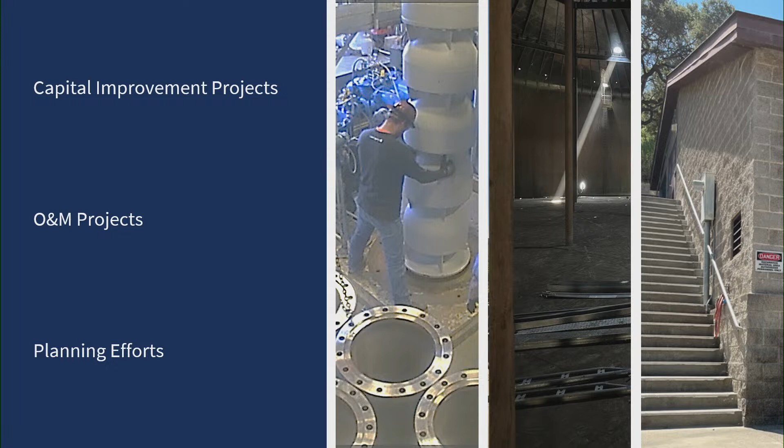First, work is continuing on rehabilitating our 3 production wells in the Santa Rosa Plain. These wells are not routinely used in our day-to-day supply, but in times of exceptional need, like in a drought, they tend to be used more. However, due to some changed regulatory requirements associated with chlorine contact time, these wells were unfortunately not in production ahead of the last drought, and we found ourselves needing to rehabilitate them.

During that drought, we were able to get the Todd Road well back into production, thanks to some heroic efforts of our staff. We also managed to secure a $6.9 million drought resiliency grant to help rehabilitate the other 2 plain wells that we have, not only to rehabilitate them for production purposes, but also to include the capability to recharge groundwater with those wells as part of a proposed future aquifer storage and recovery program, storing available winter water for later use.

At Occidental Road well, we've completed installation of a new well there. That well is intended to improve the water quality issues compared to the existing well and sanding conditions that were occurring with the existing well. Design of the top side elements of that project, the pumping, the piping, electrical, instrumentation, and control work is out for advertisement right now, with construction to commence in 2025.

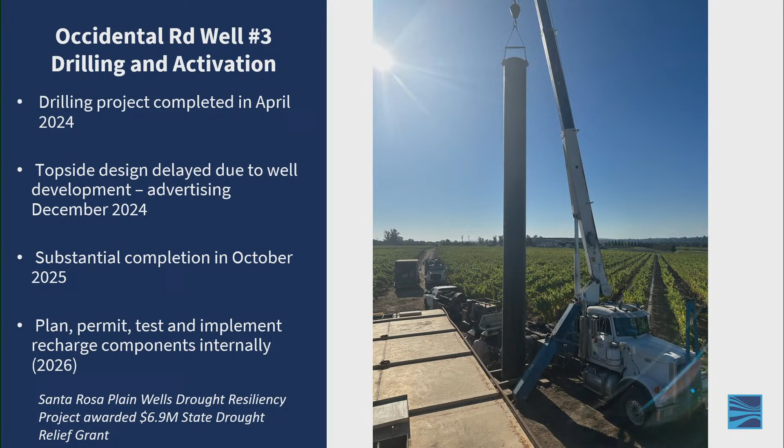The second well there, the Sebastopol Road well, is further along. This project's under construction. We completed a portion of this construction while under emergency contracting during the drought proclamation until that proclamation ended, and then we had to step back and prepare complete engineering and contract documents to bid the remaining work. This past summer, we did lose a month or two, unfortunately, due to a damaged existing valve on the aqueduct, on our 48-inch aqueduct, requiring us to implement an urgent, unplanned shutdown of that aqueduct in order to repair it.

So we now find ourselves wrangling with the weather to complete that project and maintain the project schedule. But we still do, by next summer, expect to have production capabilities ready for that well, and to be commencing the pilot testing for the aquifer storage and recovery elements. Most recently, we did receive some guidance from the State Water Board on how to pursue the water rights for diversion into storage for that well, so that was great to receive. And we're certainly appreciative of the city's coordination with us in being able to connect with the recycle water line to benefit some of the operations associated with that well.

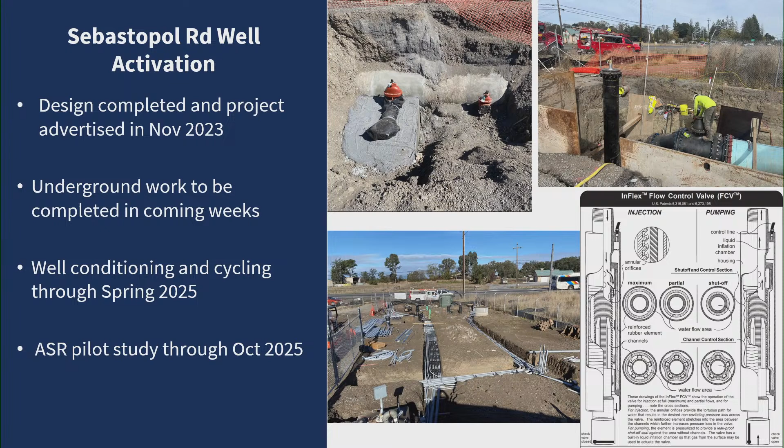One of our more significant projects is our tank rehabilitation program. It's a 10-year, $80 million program addressing some long overdue recoating of our 18 storage tanks in our water transmission system, representing some 128 million gallons of storage. With this project, we are also replacing associated cathodic protection systems, evaluating seismic conditions, and making other minor modifications as needed.

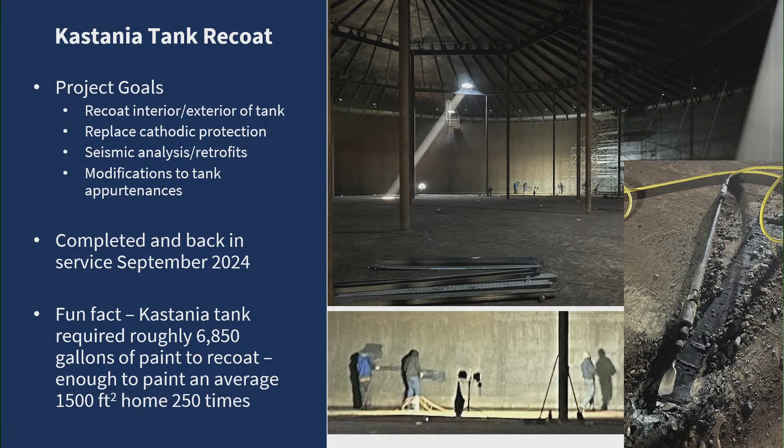So the Kastania tank is a 12 million gallon tank. It's the southernmost tank in our system that was recently completed and returned into service in September. This tank was particularly satisfying to complete, as it did represent the removal of our last coal tar tank lining in our system, replaced with an epoxy-based interior coating system. So we were quite pleased with that. And under that same construction contract, we also just last month completed and put back into service our 6 million gallon Cotati 1 tank.

One of our two largest tanks is our Cotati 3 tank. It's 18 million gallons in capacity. We recently opened bids on that contract and do intend to award that contract in January and expect to have it out of service for much of 2025 for recoating. So in addition to the interior and exterior coating work, the cathodic protection work, and other minor appurtenance modifications, things like ladders, vents, and overflows, we'll be retrofitting on this Cotati 3 tank the foundation ring, retrofitting it basically by widening it. There's a little detail up there of how they're doing that.

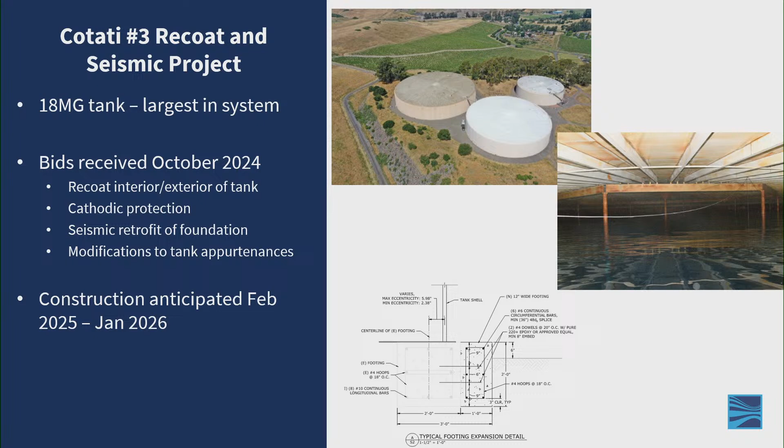To address a seismic deficiency that was identified in our seismic assessment, the existing tank is loaded eccentrically on the foundation that we are going to try to address. It is incidental work to the recoat work, but for a tank that has a diameter that's nearly the length of a football field at 280 feet, it is significant incidental work for the project.

So moving past tanks and wells, we'll talk a bit about cathodic protection. Our aqueducts are constructed with passive cathodic protection or corrosion protection systems. They have reached the end of their useful life, mostly exhausted. We are replacing them with an impressed current system, installing rectifiers, imparting a small current into the pipe to prevent corrosion.

Following some prior cathodic protection conversions on the Sonoma Aqueduct and the Petaluma Aqueduct, we're now currently advancing efforts on the Santa Rosa Aqueduct and our Russian River Cotati intertie. And we've split that effort into 2 phases, with the smaller phase targeted to advertise in just a couple months here in February, and phase 2 a year later in 2026, as the phase 2 sites had more significant right-of-way and permitting challenges associated with them. And do also appreciate the city's coordination and work with us on right-of-way and encroachment permits for those projects.

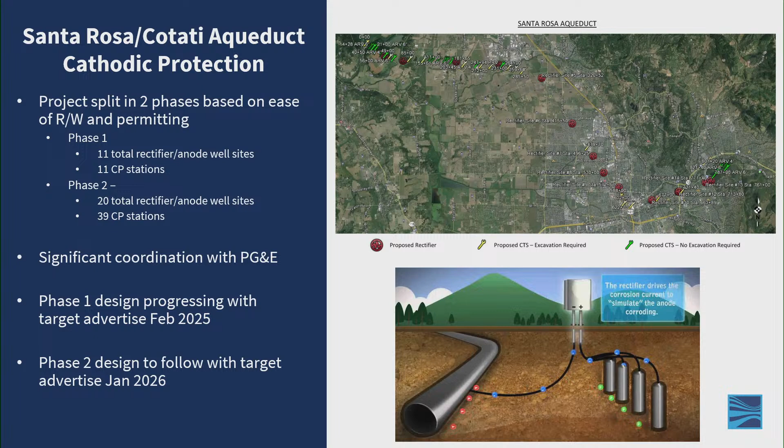At our Wilfred Booster Station, which is located along our Petaluma Aqueduct and Rohnert Park, we are updating the outdated electrical equipment, addressing some seismic vulnerabilities, and installing a redundant pump set for resiliency. While this pump station, when it's normally operated, generally pumps to the southern portion of our system, it does have a unique vital role, being our only pump station that allows us also to pump north into the Santa Rosa area from the south. This has been essential for us under certain conditions, such as when we've had portions of the aqueduct system that had to be shut down for construction or repair purposes. So it's a valued facility in that regard.

This past June, we've pre-purchased equipment for that project, and the project's scheduled to advertise for construction in 2026.

One slide that I don't have today, but I want to mention, is the Ely Booster Pump Station. It's been under contract, a construction contract with us for more than 2 years now, but we haven't yet been able to break ground on it due to the electrical gear procurement and delays associated with that. We finally now have a delivery date that's anticipated in this coming spring, so we expect to advance that project in construction this coming summer.

It's a FEMA-funded resiliency project to replace electrical gear and protect it from flooding near Ely Road in Penngrove, Petaluma area. And I mention this project primarily just to highlight one of the challenges that we continue to face, as I imagine the city is also facing in procuring electrical gear. Some supply chain challenges still remain for some equipment, but particularly the electrical gear. And this isn't our only project that's suffering through that.

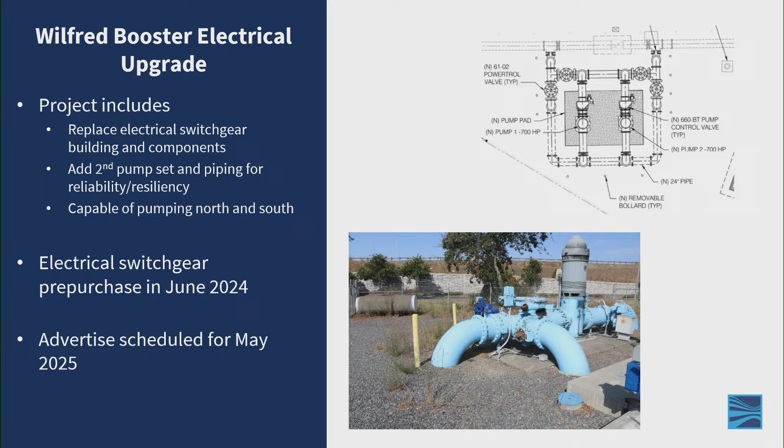This project design is currently at 30%, and we intend to advertise construction on that. At this point, the current thinking is seeking FEMA funding to substantially pay for the construction, so that's likely in 2026 that we hope to be able to do that.

Also, we've recently completed a feasibility study looking to address our outdated chlorine and pH treatment systems with a modernization project. We're kicking off the design of a multi-phase effort to implement upgrades necessitated by our aging infrastructure, some operational and other infrastructure changes that have occurred in our Wohler-Mirabel area over the years, and some newer regulatory compliance requirements being imposed. Also addressing the safety issues in converting away from chlorine gas.

Also included in that project is addressing high vulnerabilities for our 12 kV electrical system that serves the area, which is subject to high vulnerability to fire, flood, and seismic hazards, liquefaction, and lateral spread specifically. So this is a significant project both in scope and cost, constructing new sodium hypochlorite facilities at our Wohler site, our Mirabel site, as well as a new hypochlorite and pH control facility at our River Road facility in the general area.

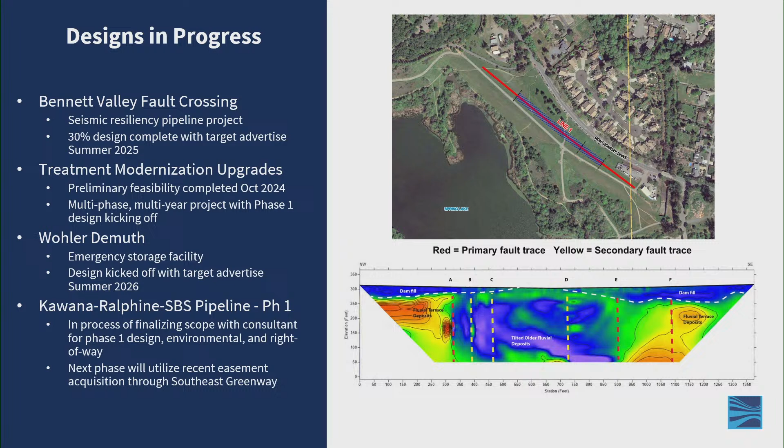On the maintenance side of things, we have been completing washout inspections of our tanks, including complete draining and cleaning of those tanks, along with minor repairs as needed. In addition to the general maintenance benefits of that work, these efforts are helping to identify the appropriate prioritization and scheduling of the tanks for the bigger tank rehabilitation recoating program that I spoke to earlier.

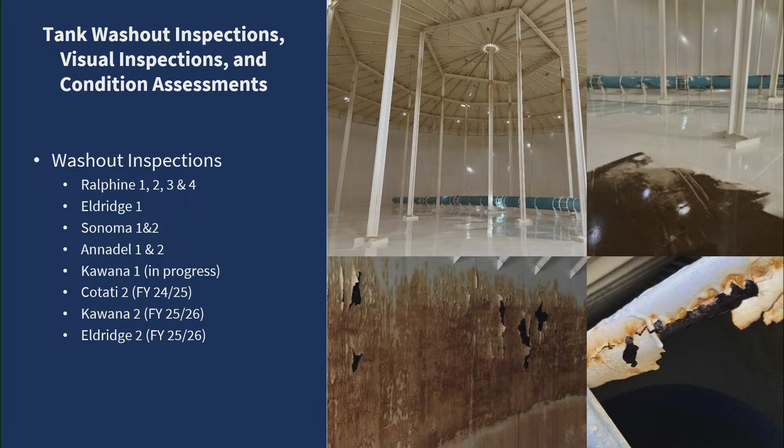Over the last couple of years, we completed 9 tanks, shown in the first few bullets here on this slide. The Kawana 1 tank is in progress right now and out of service, and you can see the additional 3 tanks there that are planned through next fiscal year.

This is just a summary showing the various tasks that were completed the last two fiscal years, those first two columns, and those that are planned in blue in the remaining columns in the current and future fiscal years for the tank maintenance program.

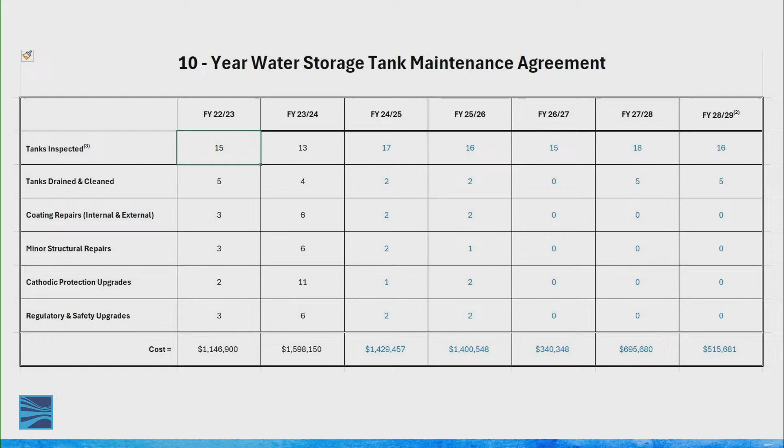On the planning front, we are in the process of developing a comprehensive master plan for our water transmission system. It is a multi-year effort, and our consultant, Carollo Engineers, has completed the first task looking at baseline conditions, assessing facility information, water supply agreements, condition assessments, long-range financial plans, and our capital improvement plan.

In the current fiscal year, we'll also be working with the city and all the water contractors coordinating on water demand projections, and our consultant will also be developing basis of cost information and project prioritization methodologies. Actual project identification and development will be the focus of next fiscal year. Other currently active planning efforts will also be used to inform this plan.

One of those is our current seismic resilience planning with our consultant Infraterra, who's assessing service interruption potential and mitigation needs and strategies in our aqueducts, our storage facilities, and our collector wells. That study recently completed more than 50 cone penetration tests across our aqueduct system to better understand the potential damaging effects of liquefaction from a major earthquake and where that is most likely to occur.

The master plan is also going to incorporate applicable recommendations from actions coming out of the regional resiliency study that we've been conducting by Jacobs Engineering, in collaboration with the water contractors, assessing the resiliency of our combined systems as an interconnected regional system in view of an array of hazards that could threaten the water supply.

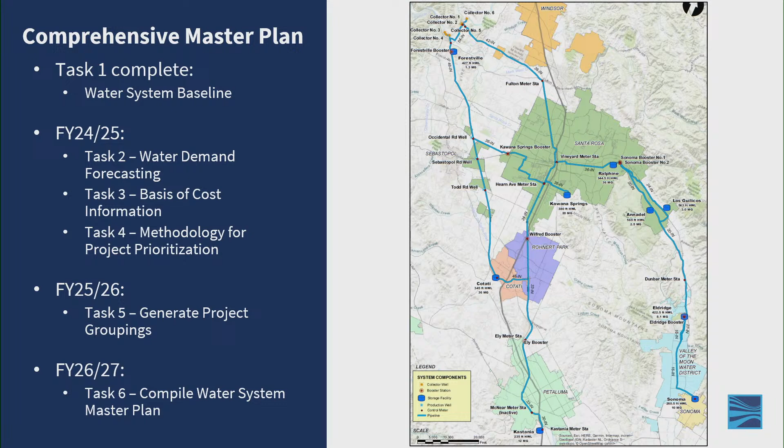So the comprehensive master plan is intended to be completed in fiscal year 26-27 and help us to better project our infrastructure needs into the future. I'd point out that this effort, along with the various projects I've been mentioning, is very much in line with our planning and infrastructure goal of Sonoma Water's current strategic plan.

And lastly, we want to report that we recently received findings from Division of Drinking Water this past October from a comprehensive two-day sanitary survey inspection of our water supply infrastructure conducted in late September, wherein 10 DDW staff members accompanied Sonoma Water staff and inspected an array of our facilities from our operations room, our SCADA systems, all six of our collector wells, all 18 of our storage tanks, our disinfection and corrosion control facilities, our Todd Road well, and two other booster pump stations.

We were pleased to see there were no deficiency findings in the areas of our pumps, system management and operation, monitoring and reporting, or our operator compliance with state requirements. There were only minor deficiency findings on a few of the items shown here in the second-to-last bullet that we'll be addressing. So we viewed that as a good, favorable report.

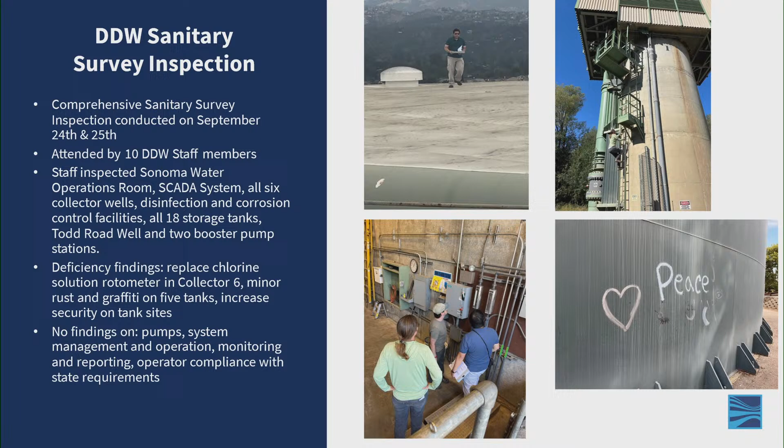Thank you for your time, and that concludes my presentation.

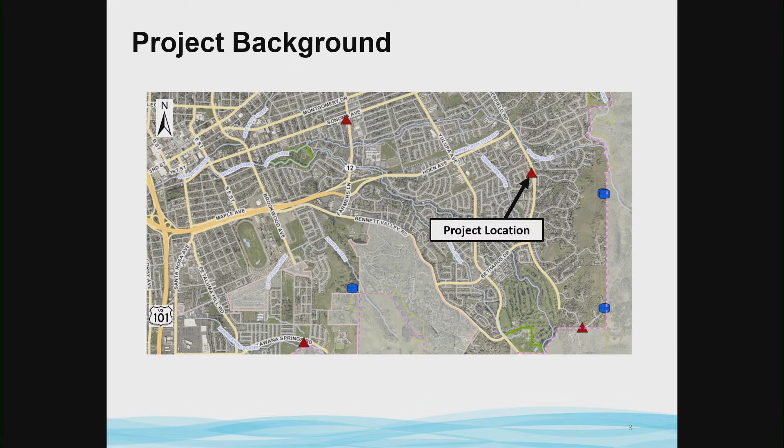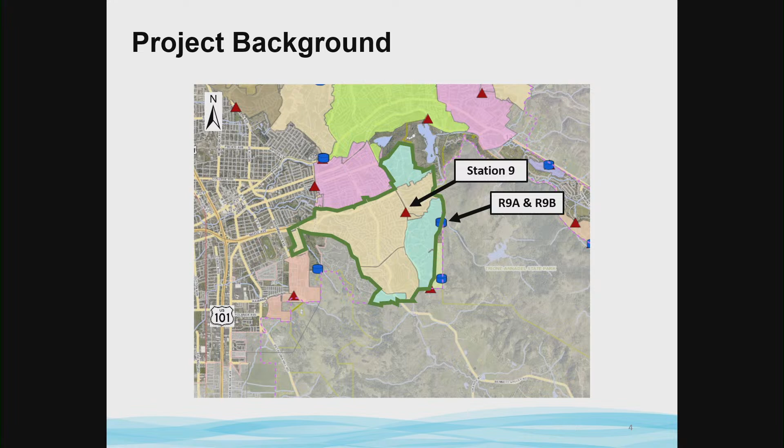Taking a step back to put Station 9 into perspective, you can see it pointed towards the center of your screen. Water Pump Station 9 is the only station that fills water reservoirs R9A and R9B. Together, the station and the two reservoirs provide water for one of the largest regions in the city, highlighted in green. This facility is considered a critical piece of infrastructure that needs a safe and reliable means for operations and maintenance, especially during emergencies.

Under current operations, there is not a safe way for staff to de-energize the entire facility for maintenance, so one of the project components will be installing a PG&E disconnect. There is also not currently a reliable method to connect and operate a redundant backup power source for the station, so a new connection would be installed as part of this project for a portable generator.

Aging equipment that is close to the end of its useful life, including variable frequency drives, flow meters, and switchboards, will also be upgraded as part of the project. As part of HVAC improvements, a new air conditioning unit would be installed because the existing one uses refrigerant that's no longer able to be sourced.

To complete all of this work, a temporary bypass pumping station would be required since the station will need to be taken offline. This is considered a relatively significant portion of the project because, as shown, this station feeds a large region within the city, and it also needs to be monitored 24/7 throughout the majority of construction.

We advertised the project on September 23rd of this year and received a single bid on October 15th. That bid amount was approximately $2.9 million, which was about 78% over the engineer's estimate of $1.6 million.

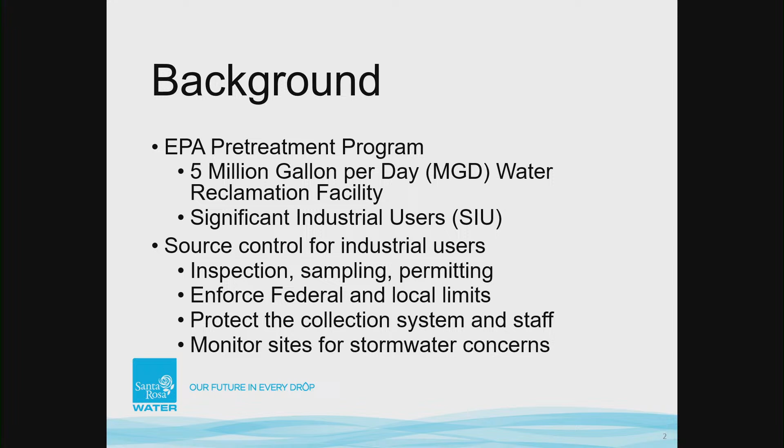So, pretreatment audits. The city's environmental compliance source control program is part of the EPA pretreatment program, the Environmental Protection Agency program. We were approved in 1983. We've been doing this for a while.

The State Water Resources Control Board must do these audits every 5 years or so, and inspect every 1 to 2 years. An inspection is an inspector going out to a site with an EPA inspector or auditor inspector, and they see what our relationship is like with the industrial user. They see what we are evaluating, to make sure it's all consistent with the EPA program guidelines, to make sure we're covering everything.

That's what an inspection is. Then they come back and look at our files. An audit, on the other hand, looks at the city code, the enforcement response program, and the workflow in the office to make sure we're catching all the industries that should be in the program here in the regional system. So that's what an audit looks like.

The last audit we had was in 2022, and these were some of the findings we're going over today.

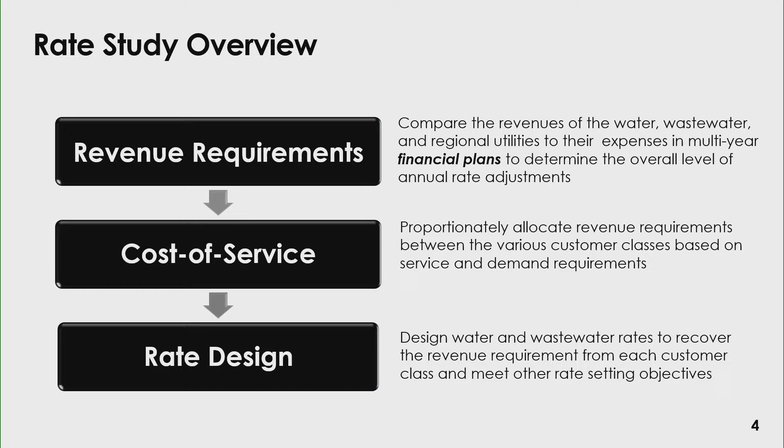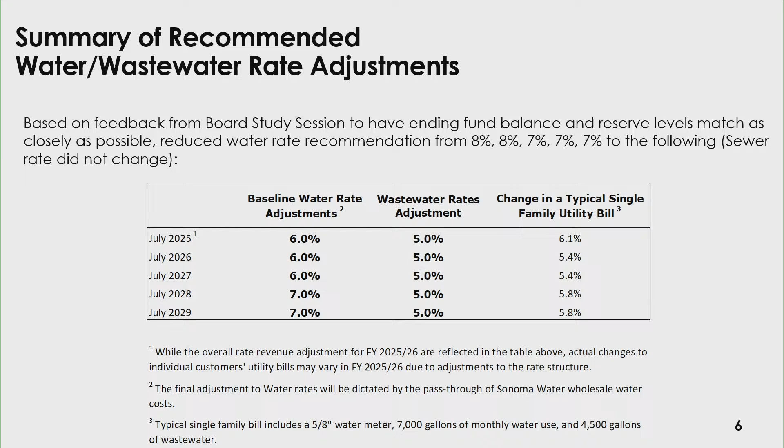You will notice that these percentages have changed from the last presentation. We appreciate the feedback we got, and we were able to take a closer look and run additional analyses on the proposed rate increases. We were able to reduce some to make sure that at the end of the 10 years we still remain at the targeted reserve levels. So we do appreciate that feedback.

When we talk about cost of service and rate design, what we do is put different types of costs into different buckets so that we can then turn those into rates. The three main buckets we looked at are customer costs, which are driven by the existence of an account—mostly billing costs, regardless of whether they're a large or small customer. The capacity costs are assigned to customers based on the size of their meter.

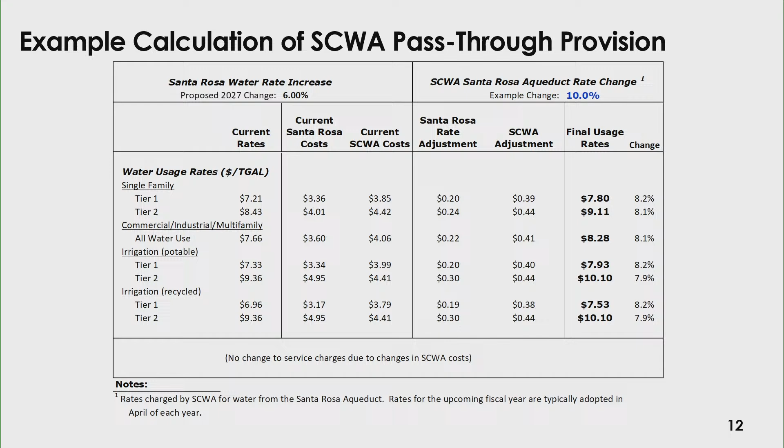Each rate here varies slightly differently because the amount of wholesale water costs within these different rates varies slightly, due to how they were structured. But ultimately, Santa Rosa Water will receive notification of that rate adjustment sometime in the spring. We'll do the math and send out a notice to customers at least 30 days prior to changing the rates every year.

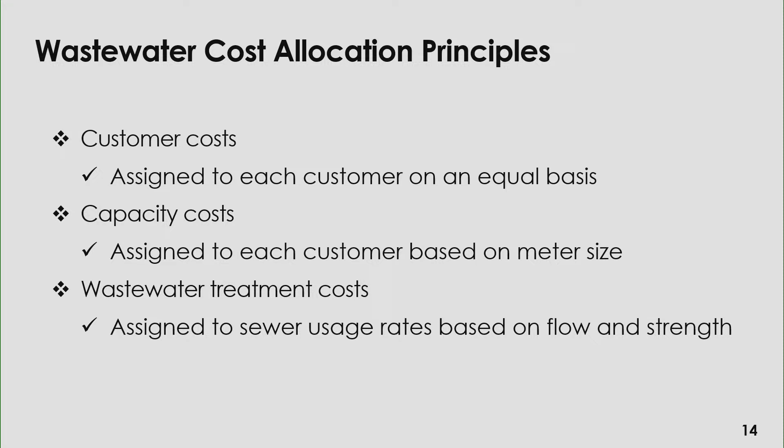Same cost allocation principles for wastewater. In this case, it's customer costs, capacity costs, again both based per meter and per meter size. The wastewater treatment cost is based on flows, but it's also based on strength, so customers with higher strength sewage will receive a higher rate because it costs more to treat higher strength sewage. Next slide.

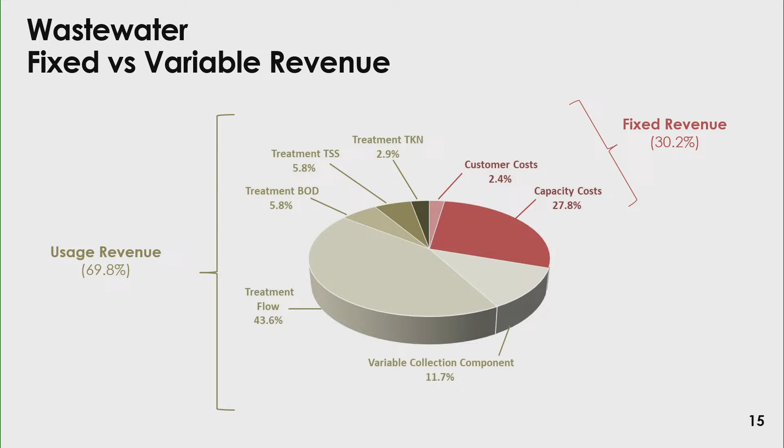Here's the pie chart showing the fixed versus variable revenue. In this case, the variable revenue through your usage charges will be 69.8% versus fixed revenue of 30.2%. Next slide.

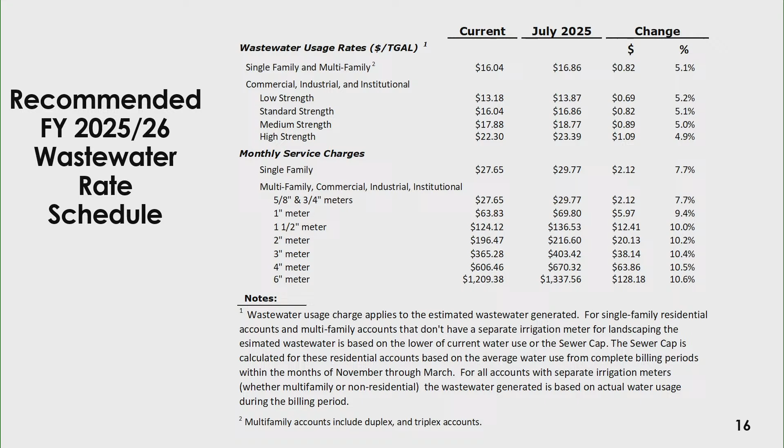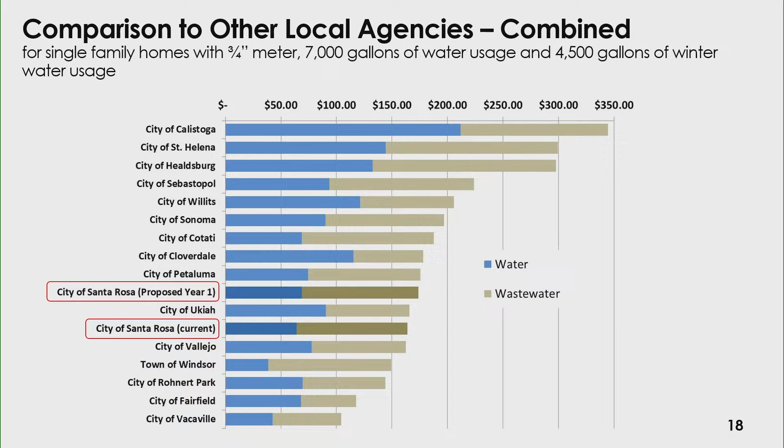Next slide. So you saw this slide earlier. Again, a recap of the rate adjustments being proposed for water and wastewater and the impact it will have on single-family bills. And I believe that's it.

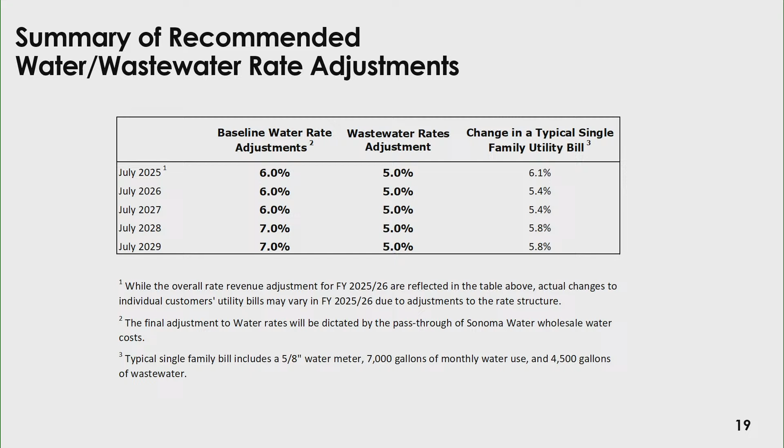From the existing PM firms, there are really two issues with using that right now. One, as Assistant City Manager Nutt mentioned last time, a previous version of that received zero responses and was redone to change the scale of the program a little bit and get some responses. That specific contract is tailored very much to our regional projects and for the treatment plant, and that's how it has been utilized.

One of the consultants I mentioned when I talked about the scale of the program we're thinking about moving forward—I asked, could you do this under the existing contract, and he kind of laughed and said, sure, if you added a zero to our contract, we'd be happy to perform those services. Both consultants kind of said the same thing: it's about the ability to project moving forward, both in terms of the longevity and the scale of the contract, that would excite more consultants to pursue it.